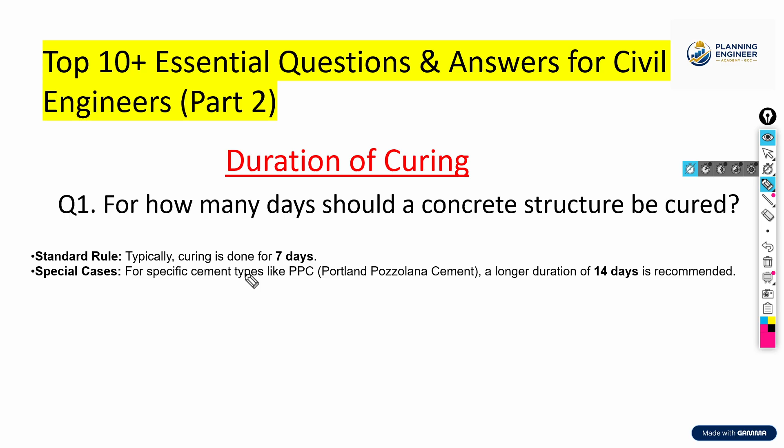Mostly we use OPC since it starts to gain strength after 35 to 45 minutes. So you just have to remember the curing period is 7 days, 14 days, 28 days. I forgot to mention 28 days here. So let's go to the second slide.

Your interviewer can ask you, make me understand what hydration is. How will you explain? This is a very technical word. What is the technical definition of hydration in concrete? It is very important; in one of my interviews they asked about hydration. I explained it, but I could not explain it in a very technical way. So it is very useful.

So just remember: hydration is the chemical reaction that occurs between water and cement. The process forms a new compound that binds the material together to create solid concrete. This is hydration. This is the cement bag. Once this cement comes in touch with the water, the cement hydration starts, and it starts to gain strength.

So hydration is called a chemical reaction, since the chemicals are there in the cement, and once the chemicals come in contact with the water, it starts the hydration. So you have to explain like that.

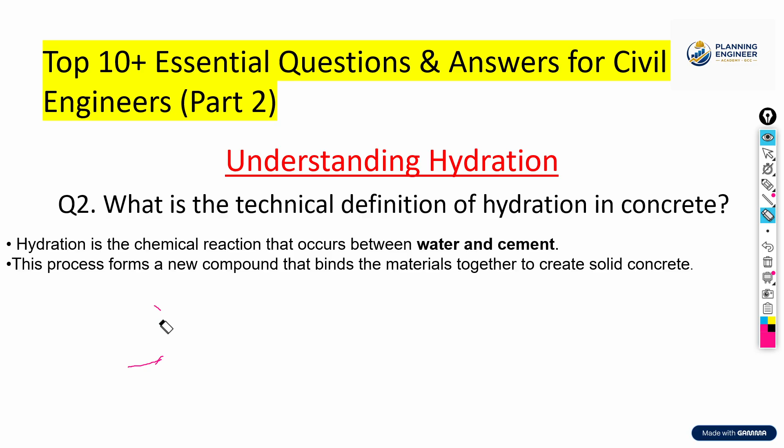Application of curing membrane. A simple question the interviewer can ask you: how many times should a curing membrane be applied? Normally it should be applied at least twice. But it is not always like that. In many cases, if the weather is too hot, in a very hot season, at least twice will not be enough.

We do the ponding curing, as I told you in my first interview session video. This is the slab, so we do one layer of brickwork here and put water on the slab for at least one week. But if the weather is cold or it's the rainy season, two times is okay.

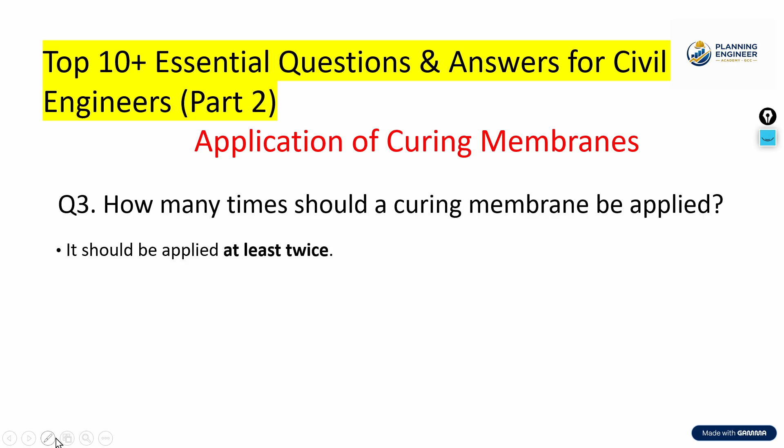So you have to explain it in these terms, sir: normally curing should be done at least two times, but if the weather is too hot, we'll do pond curing. So you have to remember. This is very important.

Water quality for curing. See how the water quality should be. The water should not be salty. Water TDS level should not be more than 1000 ppm. This is very important. What is the limit for total dissolved solids, TDS in short, in curing water? The water used for curing should not contain more than 1000 ppm.

Clean water ensures the chemical reaction is not contaminated by salt or any mineral. When the water comes in touch with the cement, this is the chemical reaction. So if the water is contaminated with salt and minerals, reactions will come from both sides. So the concrete will not achieve the target compressive strength. So you just have to remember.

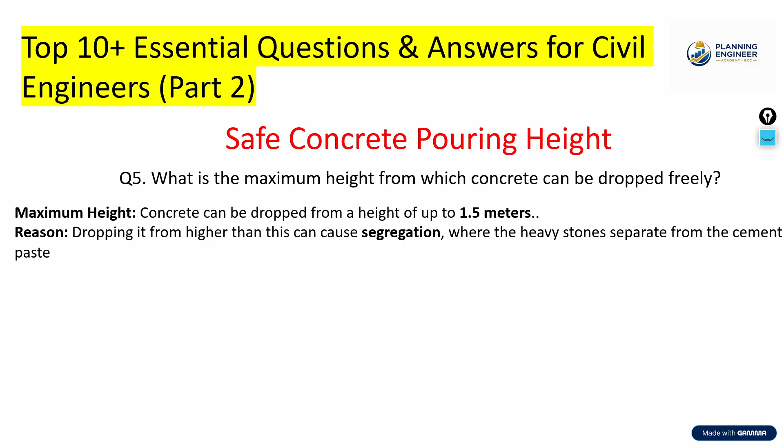Okay, so this is reducing the water cement ratio. For reducing the water cement ratio, we use plasticizer. Already I told you how we reduce it. What are the advantages of using a lower water cement ratio? Water cement ratio I already covered in my first video of the series, where I explain what the water cement ratio is. I will give the formula and everything, and you can understand what the water cement ratio is.

So the advantage of using a lower water cement ratio is higher compressive strength and increased water tightness, lower absorption, better resistance to weathering, and a strong bond between the concrete and steel reinforcement. Okay, so higher compressive strength and increased water tightness. So you have to just remember.

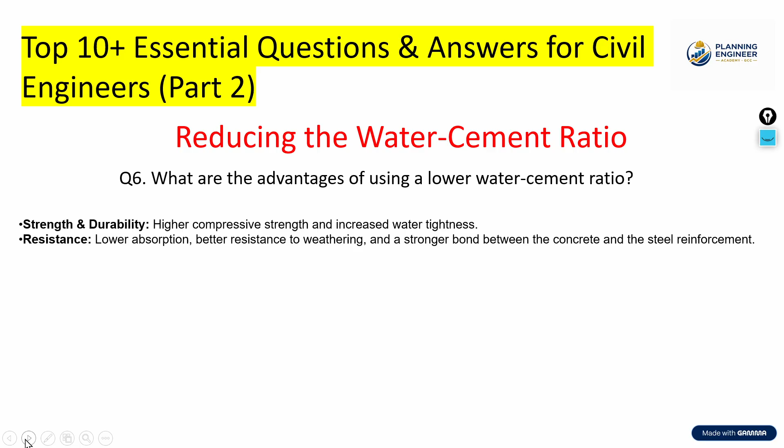Basic types of concrete. What are the two primary categories of concrete used in construction? Structural concrete and non-structural concrete. Concrete is divided in two categories. Structural concrete is used for load-bearing elements like beams and columns. So we use grade M20 to M60. After M20, as I already told you, we do the design mix.

In some places, in local structures like in villages, some people use M15 also, with slab thickness of 150 or 125 mm. But it should not be like that. We should not use concrete less than M20 grade. What is M20? The M20 grade ratio is 1 cement, 1.5 sand, and 3 aggregate. This is the ratio of M20. Okay, so just remember.

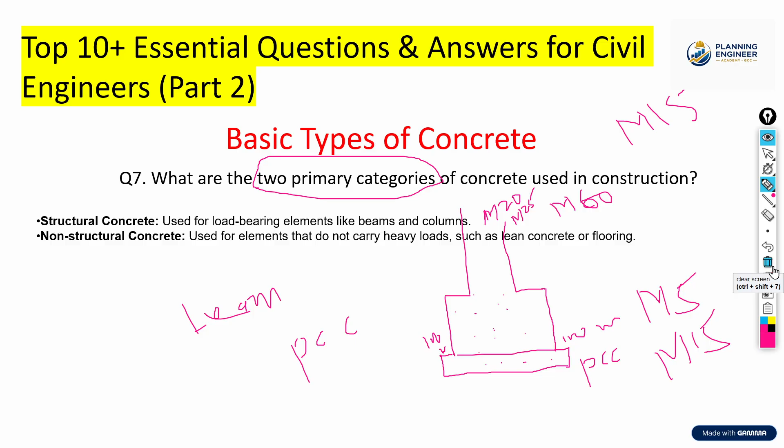The grade is M5 to M15 for PCC. Mostly we use M10 PCC. Lean concrete is PCC, you have to just remember. Some people are confused about what lean concrete is and what PCC is. They are both the same. Some people say lean concrete, some people say PCC. Okay, so you have to just remember.

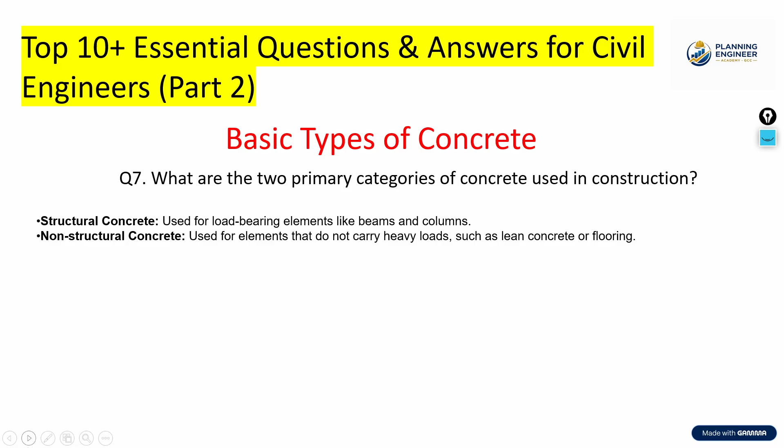Concrete strength development. How does the 7 days strength compare to the 28 days strength of the concrete? At 7 days, concrete typically reaches 70 to 75%. In 14 days, we achieve 90% of our strength. In 28 days, we achieve 100%. You have to remember, the interviewer may ask you. Done? Let's go.